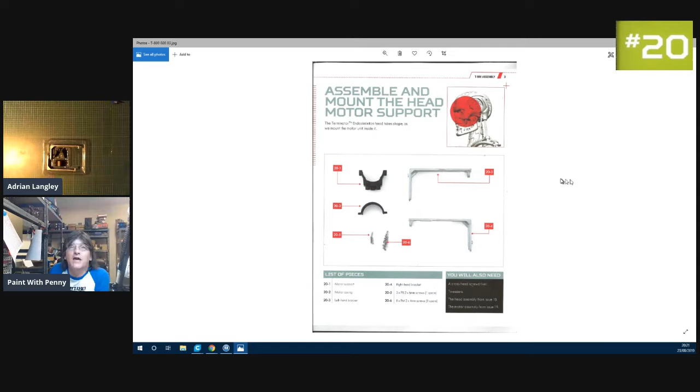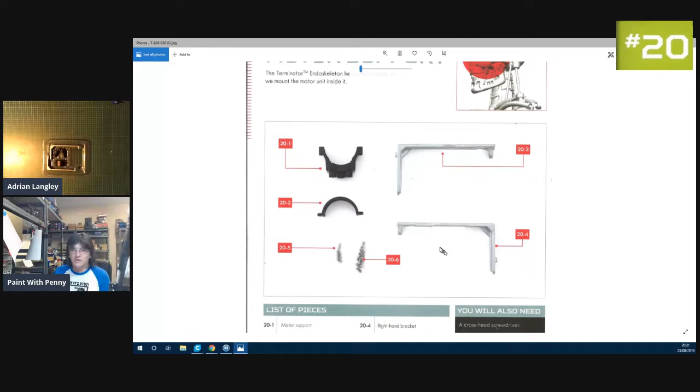As you probably remember, my lower screen is below the shelf. So the parts we've got this week is piece number 1, the motor support.

This looks familiar. Oh, of course it does, I did show them last week, roughly. Do you know what I'm looking at? I'm like, did we do this last week? No, we didn't do it, we just went rough, we just showed the parts off.

Yeah, it's clipped. So you've got piece 20-1 and 20-2, which is the motor support and motor casing, which we speculated will go together to form a circle.

And then we've got piece number 3 and piece number 4, which is the left-hand bracket and the right-hand bracket. Now, they don't look different - yes, they look absolutely identical except for a little nobule. There's one there, and instead of being there, and if you look on the back, does it say L&R on it? Yes, they do. See, that's a good little touch there, isn't it?

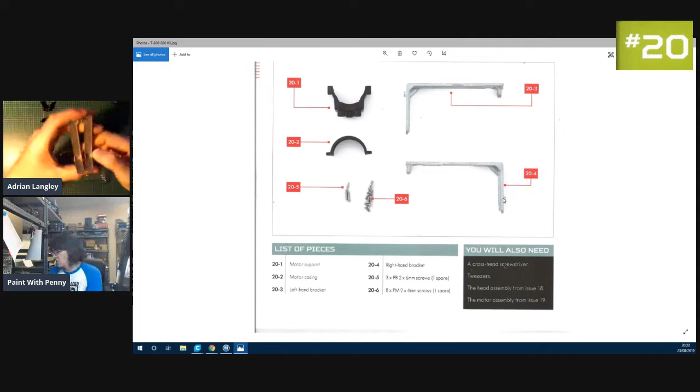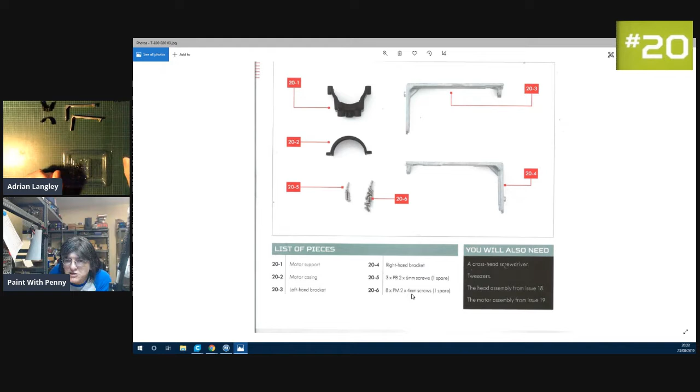So with that, you should get 3 PB 2x6mm screws, so that should be 2 and then 1 spare. And 8 PM 2x4mm screws, so we should need 7 and 1 spare. Okay, and we will also need a crosshead screwdriver, tweezers, the head assembly from issue 18, and the motor assembly from issue 19.

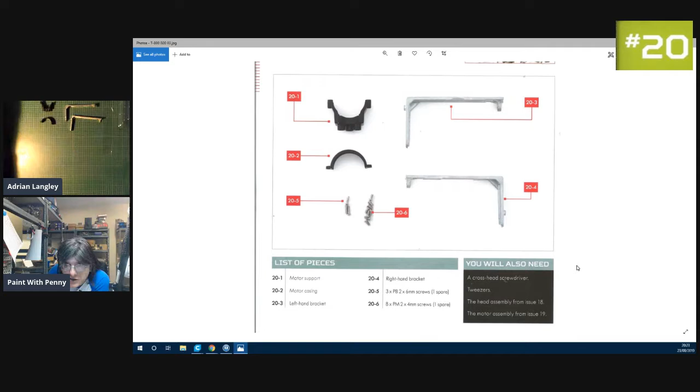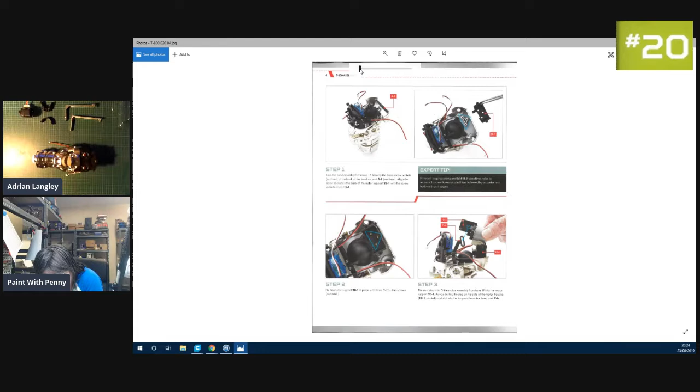So that's nice, I do like when they say get parts from previous issues, because it means we're putting things together. So we have a big jumbling mess. There we go, it looks a bit clearer now. Look, it looks like someone's taking a shot with a bazooka.

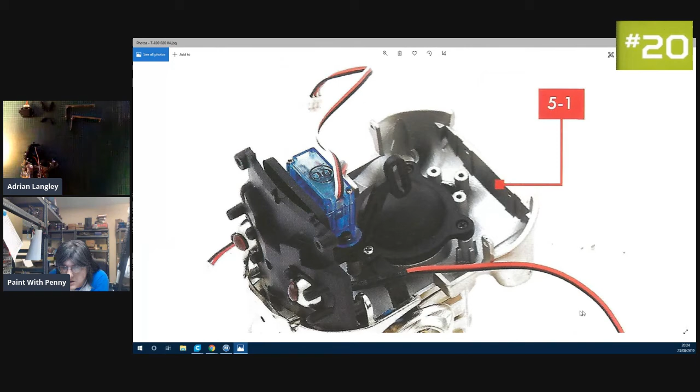So step 1, take the head assembly from issue 18, identify the 3 screw sockets outlined. I can't see the outline on that - can you see where it is? Oh, there - is that them there? Yeah. If you look at the image, you've got it highlighted a bit more. Is it just I've got it a little bit small? Probably. It doesn't look like there's any highlighting, but I can see 3 sockets. So that's fine, as long as there's 3 sockets.

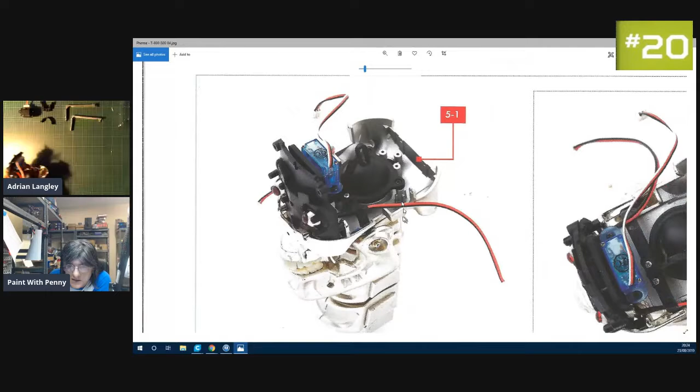Okay, and let's make that smaller again. I wish I could do this with buttons, you know. If anyone knows any keys that I can press to make it bigger and smaller, that would be appreciated.

So we've identified the 3 screw sockets outlined at the back of the head. Oh, do you know what - I'm sorry, I feel daft now. There they are, they're highlighted in the second picture, not the first one.

Align the screw sockets in the base of the motor support, which is piece 20-1, with the screw sockets on piece 5-1. Okay, there's the 3 holes. Lovely, here's piece 1, and you'll find it'll go on like so.

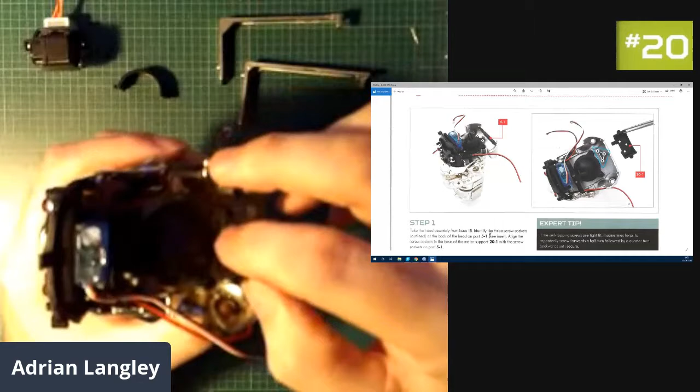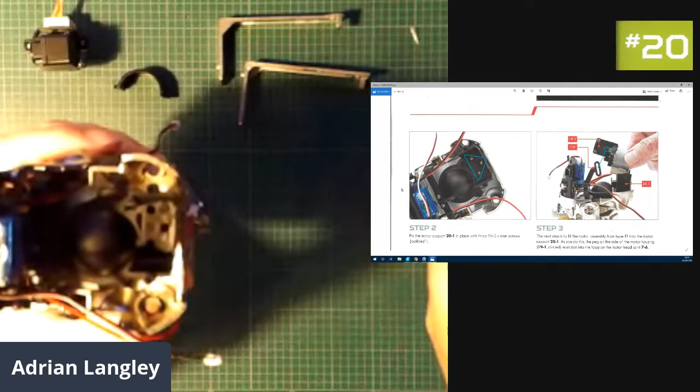So once that's on, we want to fix the motor support in place with 3 PM 2x4mm screws, again outlined, in step 2. There looks like there's going to be an awful lot going into a small space. Yes, because the thing is with these parts is that they're using standard parts - regardless of, you know, if it was a full-size head, there would obviously be the same parts going in, but there would be a lot more room to put them in.

So I just got out the wrong head, I was thinking, why didn't this one fit? So I'm guessing actually it's cheaper for them to do a 1:2 scale Terminator than it would be to do a smaller scale, because they're using off-the-shelf parts. So if they did a 1:3 or 1:4 scale, they would then have to have servos and motors specially made, and that would increase the cost. So bigger is actually cheaper - all the parts might be already on the shelf. Problem is they could be more cost effective. Yeah, but if you compared servo motors as on the radio control cars, could be one size, could be a certain price, and you went for a smaller one - tends to be just a servo, doesn't it?

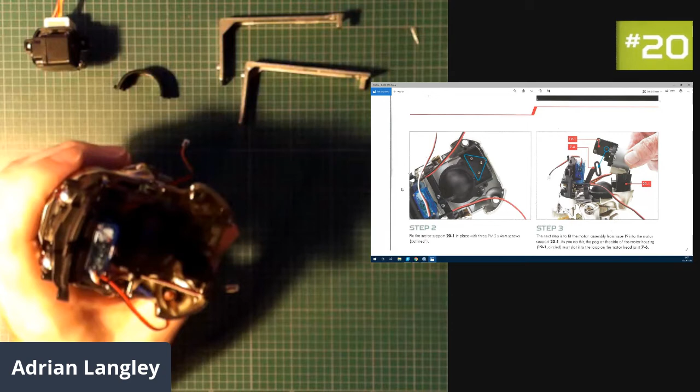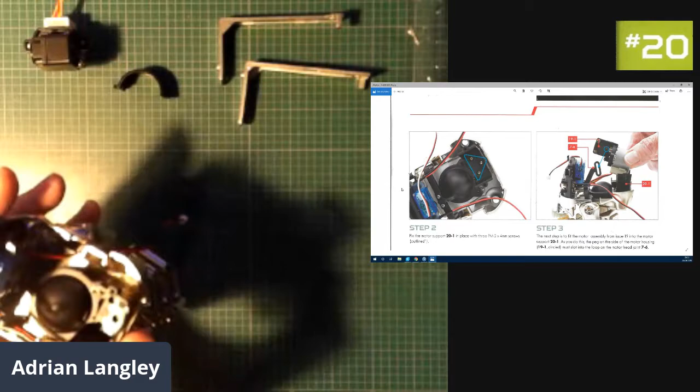Well, it depends if they had to go smaller servos, basically. I don't know if they make smaller servos - I know they make bigger ones, but they tend to use the ones that you've got. I've been doing some updating for another project, so I'm being quoted names, and I'm guessing that's either an MG or an SG - MG90 or SG90 servo. I haven't quite figured out what they mean, but I'm under the impression there's a difference between the SG and the MG.

Right, that's step 2 done.

Okay, so the next step is to fit the motor assembly - this is step 3. Fit the motor assembly from issue 19 into the motor support 20-1, which is the one you've just fitted. As you do this, the peg on the side of the motor housing must slot into the loop on the motor head joint. So there's the joint you've just assembled, and that's the part you're putting there, 19-1. There's a little oval hole bit - what would you call that? It's sort of a guide, isn't it? Yes, so that's got to go into there.

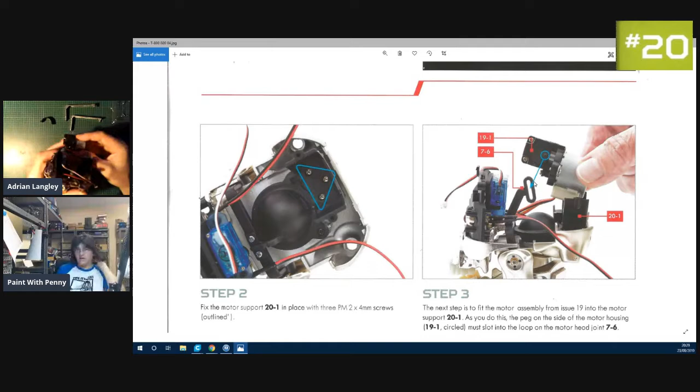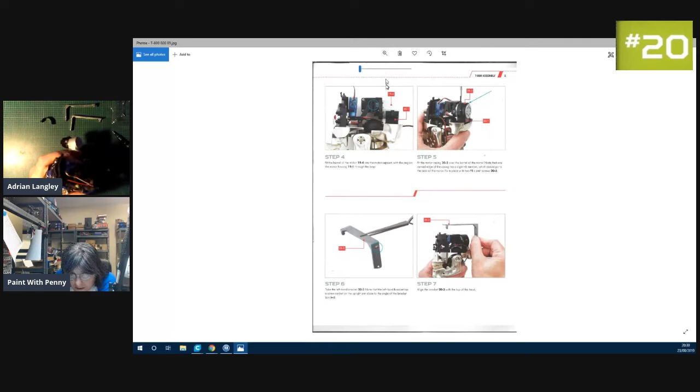So it's a little bit of precision work, lots of dry testing, dry fitting, and I'm guessing what the next stage would be. I'll get that ready for the next bit if you want. But yeah, so that pops in there like so. I'll keep that on screen now.

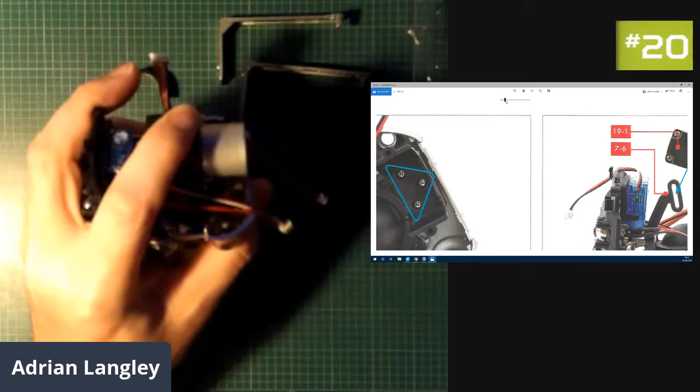Are you guys all right with the instructions being the way it is now? I quite like it, because obviously a lot of people might be following along with the magazine themselves, but I think it's small and big enough that you can still see it, while being small enough that we can focus on what Adrian's doing. Yes.

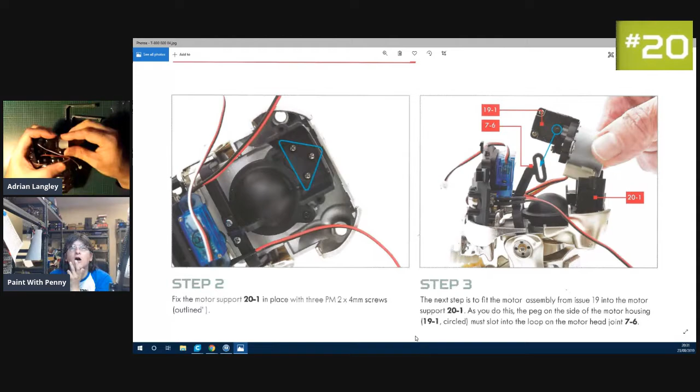So is that as fiddly as I dare say? Do you want to just change the view, Adrian, so we've got you a bit bigger? Well, I disassembled it and put it in, and I took it back to you, by the way. Okay then, I would say just keep the view so the instructions are smaller, unless people actually say no, we want them bigger.

Now, remind me - did we get a test thing with this, a little battery pack? No, only for the lights. Ah, okay then. It would be nice if they had a circuit board, basically something to test along the line - test the motor sort of thing. I'm sure that'll come now.

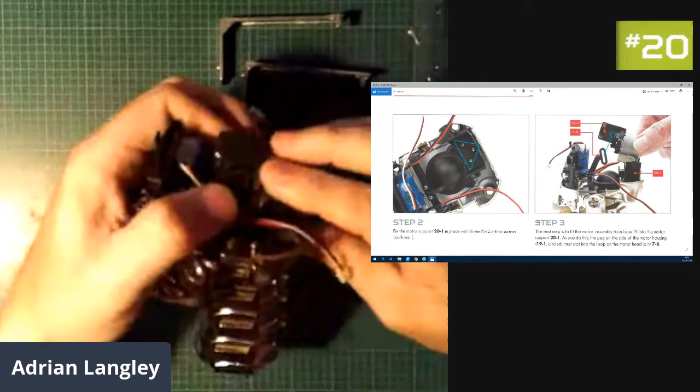Right, so how are you getting on? Is that in? That's in. Okay, doesn't seem to be any screws involved in that. Not at the moment - is that like slotting in? Yep. Okay, if you're happy with that, then stay.

Well, there seems to be a bit of a lag between you and me. Hello, Dave Milne, how are you? Oh, and Dave say so - we didn't say hello, right.

So step 4 is to fit the barrel of the motor, 19.4 - that's the big silver part - into the motor support, with the peg on the motor housing 19.1 through the loop. Then step 5 will be to fit the motor casing, part 2 from this issue, over the barrel of the motor. Note that one curved edge of the casing has a slight rib, which looks like it's going to be near the top, which should go to the back of the motor, fixed in place with two PB 2 by 6mm screws. So basically what we're doing is clamping that motor in place.

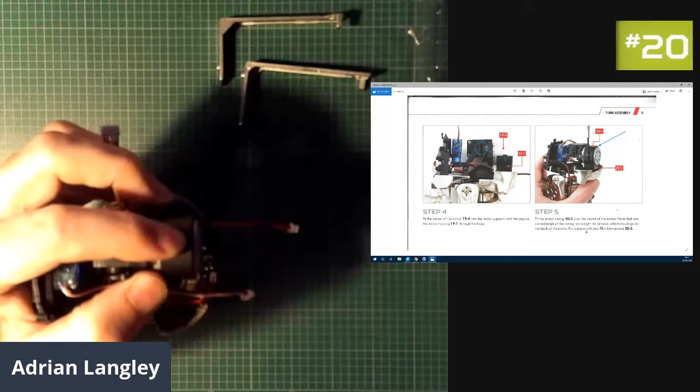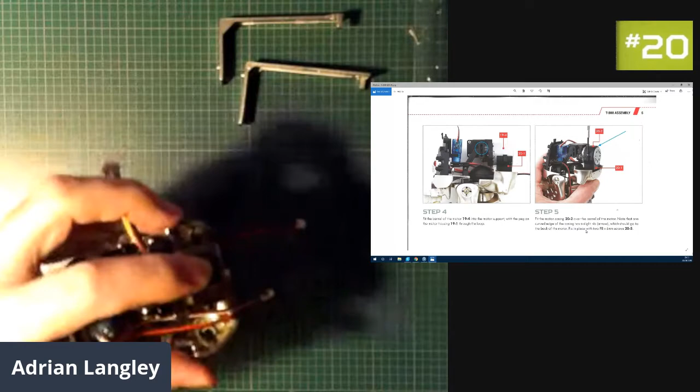Yes, excuse me. Dave Milne had a ride on a PD2 bus today at Beamish. So I am very jealous, to the point I may not talk to him anymore unless he shows us all pictures. That's it - if there aren't pictures, it didn't happen. Have you got any proof to say? Yeah, need proof, we don't believe you. Oh, don't tell me - just sent you some.

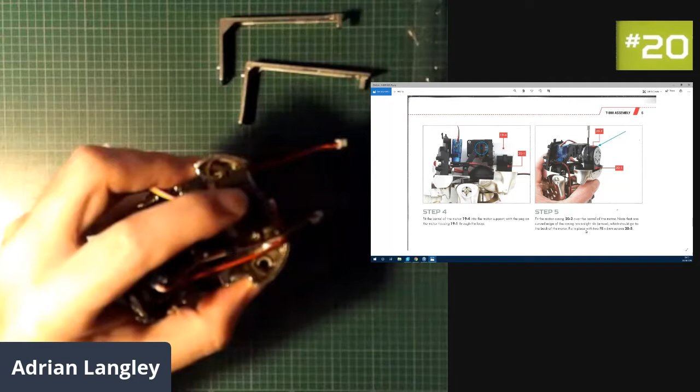No, I'm just getting a bit fed up with Android. I've just checked my phone, and the last couple of weeks I've been getting adverts pop up on the phone. It's not a major problem, I just hit the home button and it disappears. But what's now happened is there seems to be calendar entries put into my calendar without my permission, saying 'have you won an iPhone, 1856 at Best Buy?' And that I kind of object to, because I don't want that. There's a reason I use my calendar, and it tends to be for work. Oh, yes.

Can you reply and say a 2-worded sentence? No, but what I've managed to do is go to delete it, and it's a series of events, so I've deleted them all in one go.

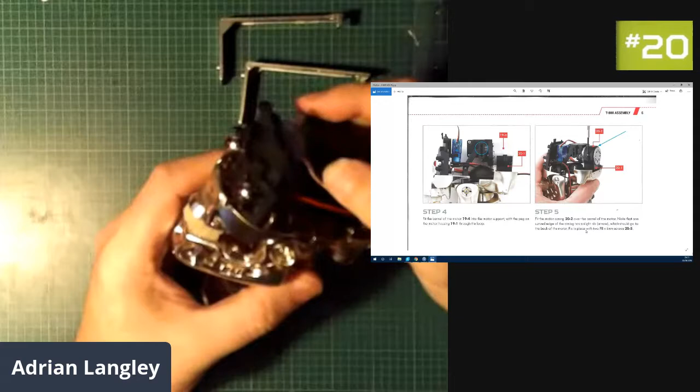It's fine, I don't mind junk. You usually have the option to turn it off, and if I buy things at a great deal that's super cheap, I welcome the occasional junk mail because they might offer me something else at cut price. But I don't go for the 'have you won an iPhone' type things, because you usually find you've got to press about 58 buttons and give your email address to 4 million people, just to find out you didn't win.

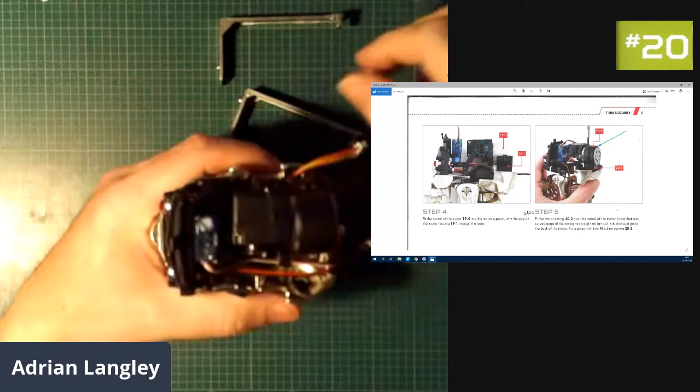Right, I've done that. Okay, that's looking hefty now, Adrian. Right, so we want to take, oh, that looks interesting. So we take the left-hand bracket, piece 3 from this issue. Note that the left-hand bracket has a screw socket on the upright arm, close to the angle of the bracket.

At this point it looks like it's not actually going to fit in there. I'm sure it will.

Right, yes. Is that a little bit tricky, Adrian? No, I thought it might be tricky, but okay, we are only aligning it in there at the moment. There's a pin you've got to locate up there as well.

Right, okay, so we can guess what step 8 is going to be, with your 14th arm that you've just grown to help you with this build, hasn't it? Okay, the tab with the screw socket at the front of the bracket will fit in front of the screw socket on the top of the head. This is a locating hole in part number 3, which matches a locating peg on part 1, 2, shown above.

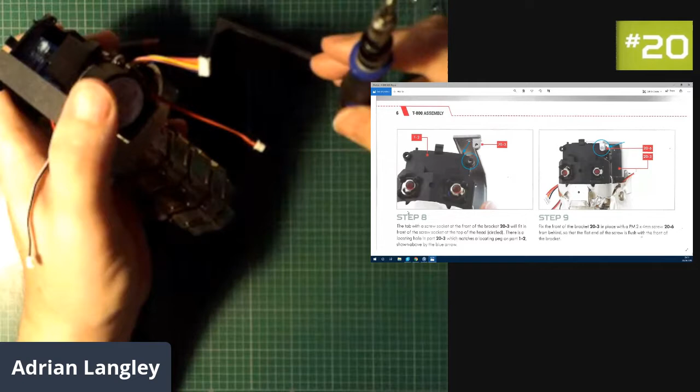Well, yeah, I mean, I would have attempted that from the way you've just done it, because it says fix the front of the bracket in place with a PM 2x4mm screw from behind. So from behind is your screwdriver at the back of the head and the screw at the front of the head. Yes, okay.

So are you ready for the next step? Yep, well, I'm about to do it. Okay, can you do me a favor, can you just show us the front of that screw, but from the front of the head?

Yep, certainly, just want to see how does that stick out, does it show? No, it doesn't stick out. It looks like it's about half a mm shorter, another half mm and it'd be flush with the bracket.

It's in enough to catch that bracket. Yes, it's in enough, but not long enough. If I run my nail over it, I do feel it, but it's not long enough to be sticking out beyond the front.

Correct. Yeah, so do us a favor, give it a quick wiggle. How secure is that? Because it doesn't seem to have been secured at the back, does it? Has not yet. Right, but look, there's a screw hole there, is there? Yes.

Probably a circuit board or something, do you think? Well, I reckon the circuit board on the back. Other people reckon there might be a battery pack going in there.

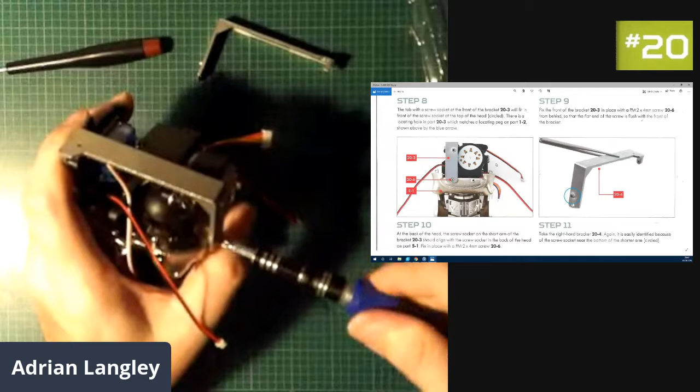Let me just catch up with what you're doing. So at the back of the head, the screw socket on the short arm of the bracket should align with the screw socket in the back of the head on part 5-1, fixed in place with a PM 2x4mm screw.

Now we're using 7 of these screws, aren't we? Yes, we've already used 3. These ones. Of course we have, yes. Yeah.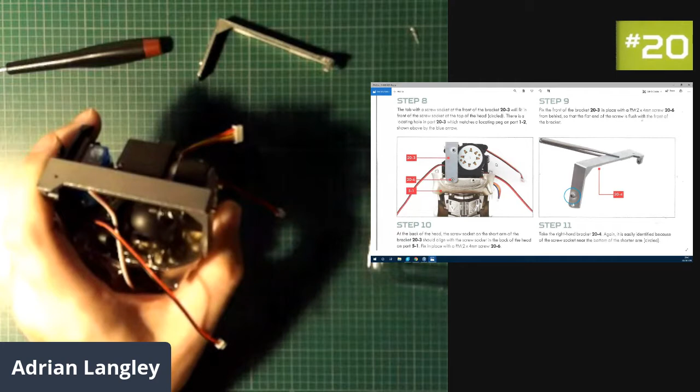Did that not go in well? Oh no, it's all right. So okay, you know it did go in, all right? Okay.

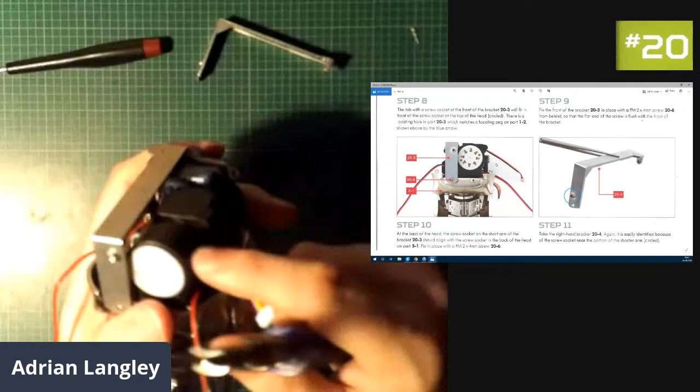No, I thought those 2 ones there were meant to be the long ones. Of course, no, the long screws weren't there. I just forgot about it. I just basically lost myself in what I was doing.

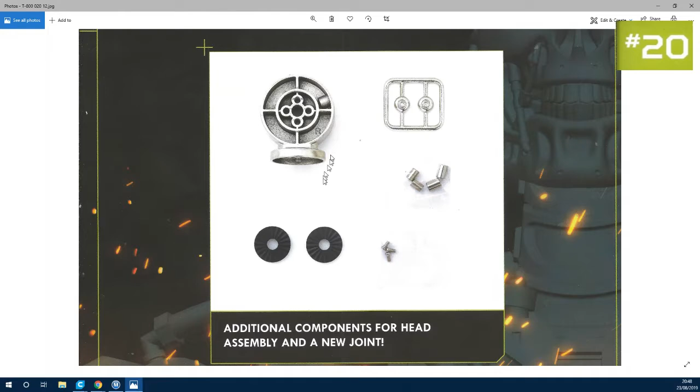It's the top of the shoulder. Okay, joint. So near the arm then. Close to the arm. Reminds me of a joke. Where did Napoleon keep his armies? I don't know. Up his sleeves.

Right, so this is the cover of issue 21. Always the same every week, aren't they? Just with a different number. So we have got: assemble the right shoulder joint and connect up the skull.

Now I'm excited. So the pieces we have got in this issue, we'll begin building the right shoulder, tidying up the jaw joint and connecting the head to the top of the skull. So we are close to finishing the head then. Yep.

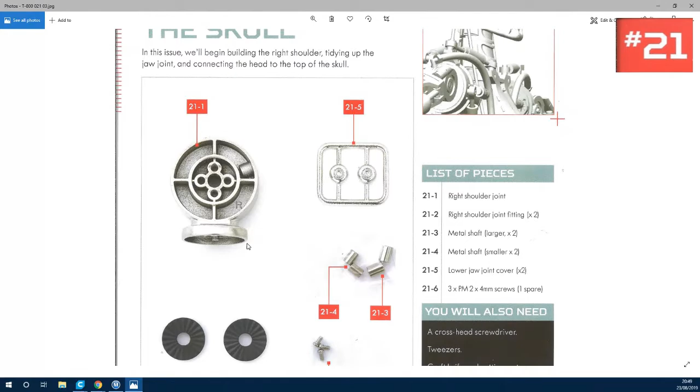Lovely. So the first part we'll need is a right shoulder joint, and that's the piece that is metal. Oh yeah, let me just - that's fine, Dave, I'll bring the picture up later on unless you object. It's very nice stuff anyway.

So we've got, I'm guessing they're identical, just a different size. You've got metal shaft, the ones on the right are larger than the ones on the left, which is piece 4, metal shaft smaller. And I'm going to guess they're metal because they're called metal shafts. Yes, bit of a giveaway, wasn't it? And then piece number 5, which I'm going to guess are plastic because they're on a sprue.

Lower jaw joint covers. So we're going to screw a bit of the head in, and then we're going to cover the screw up with those, are we? Well, they're to cover the mouth joint.

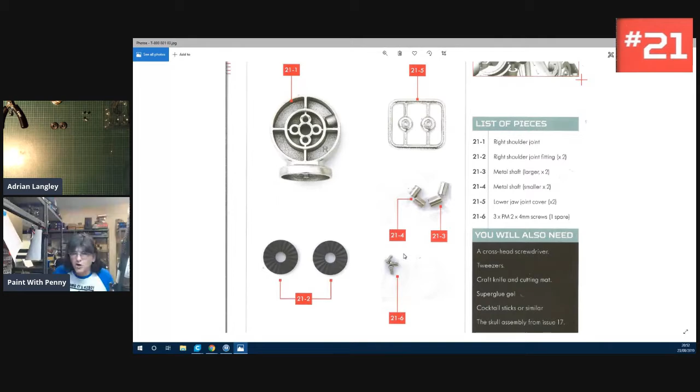So I would actually be looking at sprue cutters myself. Here we go. And then just trim it up with a knife or a file once you've cut them off. I have a slightly different way of cutting - I don't go right up to the edge of the piece. I go about 1 or 2 mil from it, and then I'll just finish it off with a file. But that's my way of doing it. Copy me if you want or not.

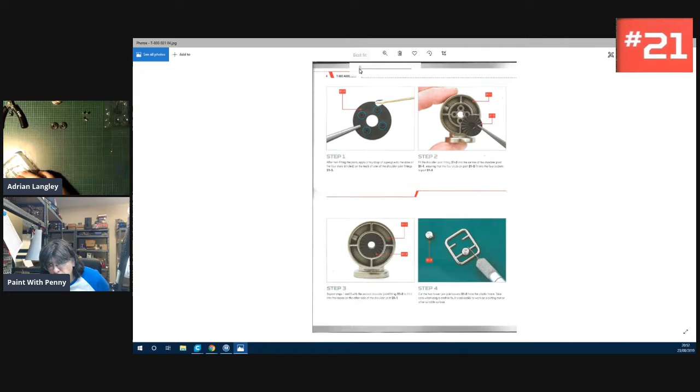Oh yeah, it's person's choice, isn't it, sort of thing. Yeah, I'm just worried sometimes, especially like when I used to do the older, cheaper model aircraft kits, you can go right up to the end and split the actual piece that you want to use. So right, just bear with me one sec. So I've got a glimmer of optimism.

Oh no! It's failed. No, it hasn't failed. Oh, right. No, sorry, right.

The printer has been playing up. I've been running it now for a couple of hours, and it hasn't had a blockage. What happens is the extruder clicks, and it hasn't clicked for ages. I just went to have a look at it, and as I got to the printer, it just went click. I'm like, bugger. So anyway, back to this.

Couldn't you try and push it? Oh no, it's the filament in the tube. You couldn't try and push it in through, could you? No, I've got other ideas I want to try, but they all take time.

What I'll do is wait for this print to completely fail, because sometimes it recovers itself. Not to worry. Right, Phil.

So step 1, after test fitting the parts, apply a tiny drop of super glue to the sides of the 4 studs on the back of one of the shoulder joint fittings, piece 2 of this issue.

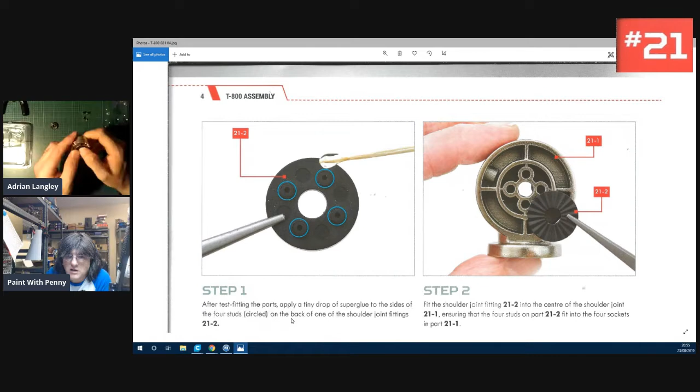So step 2 will be to fit the shoulder joint, piece 2, into the center of the shoulder joint, ensuring that the 4 studs on part 21.2 fit into the 4 sockets in part 21.1.

Well, Chris Campen, he basically had to do it off stream because he put one in and then had fun trying to get it out, so he had to do it later.

What issue are we actually up to in real life? Because obviously we've been doing 2 to catch up, so I'm wondering how far we are from doing just a single issue every week. Right, the last issue I bought from the shop is issue 26. And all the subscribers, we're nearly there then, aren't we? All the subscribers have received issue 26.

I'm afraid I have not received both my issues. No, that's fine, we'll get there. We were doing 2 issues a week to catch up because we started part way into the build, and then we had a few problems, mainly caused by me. So we said we'll do a double issue to catch up, and I'm a little bit sad that we're catching up now, because once we get to 1 issue... although maybe it's all worked out.

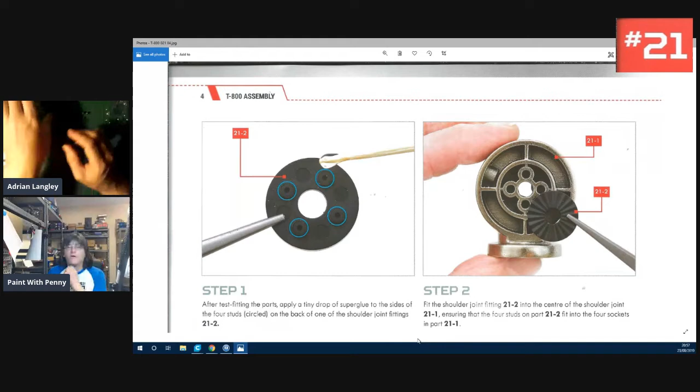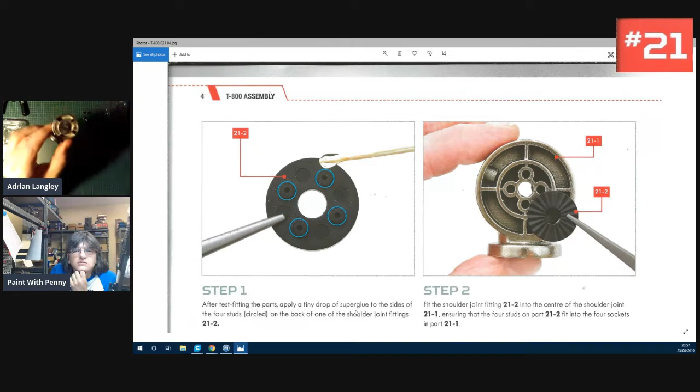Right, that is done, that is done. Can we have a look? Or would you rather leave it for the glue to set? Well, it's not a joint you can actually move about, so it's there you can basically show it. Right, okay, that's fine then.

So step 3, repeat steps 1 and 2 with a second shoulder joint. So remind me, did we get another joint in a previous issue? No, this is the same joint.

Well, we'll do. So are we going to be doing the other side then? Right, okay. So repeat steps 1 and 2 with the second shoulder joint to fit it into the recess on the other side of the shoulder joint.

Gotcha, right, okay. So step 4, and that's nicely done actually, because we can now work on something - here's another one not done. Right, okay, so that one needs it. Is that the one we're going to be putting in? So are we going to be waiting for the washery bits to go into that second one? Yes, right, okay, that makes sense now.

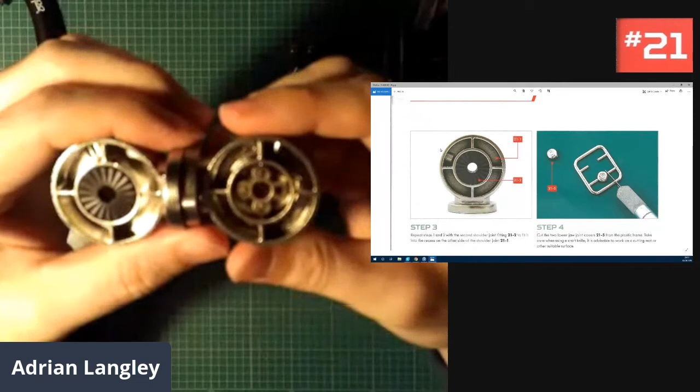Well, that's jumping ahead. That's the right, that's the left. Yeah, gotcha, right. It's like a pair of eyes, Adrian.

Sorry, just bear with me one sec, Adrian. I can't work out if my printer is pulling filament through. I had a bit of masking tape somewhere - because the rolls of filament are black, what I often do is put a thin strip of masking tape on it, and every couple of minutes I'll have a little look. If the masking tape's in a different direction or position, I know it's moving. So obviously the masking tape is white... that's gone again.

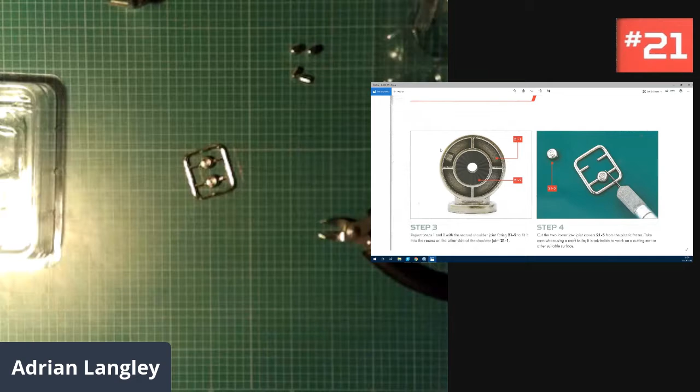Right, sorry Adrian, I'm with you now. I do apologise. That's okay. So yeah, from a distance I can see a bit of white tape on a black background.

So step 4 is to cut the two lower jaw joint covers from the plastic frame. Take care when using a craft knife - it is advisable to work on a cutting mat or other suitable surface. Don't do what I do and cut towards you, you tend to end up with cuts in your thumbs. If you're using sprue cutters, always hold the part because they do tend to fly.

Of course, it will gradually go into there.

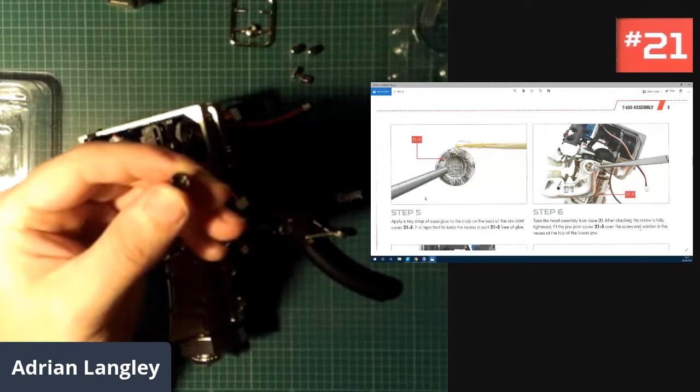So stage 5, a tiny drop of super glue to the studs at the back of the jaw joint. It's important to keep the recesses free of glue. Then step 6 will be to take the head assembly from issue 20. After checking the screw is fully tightened, fit the jaw joint cover over the screw and washer in the recess at the top of the lower jaw.

I tightened the screws earlier, if you're just wondering. Okay, I had them. So I didn't cut them both off, I just wanted to try one first off. That's fine, I would cut them off as I need them.

So I'm guessing the next step is to repeat. Yeah, step 7 repeats 5 and 6 to fit the second jaw cover on the other side of the head. Grip the two covers in place while the glue dries.

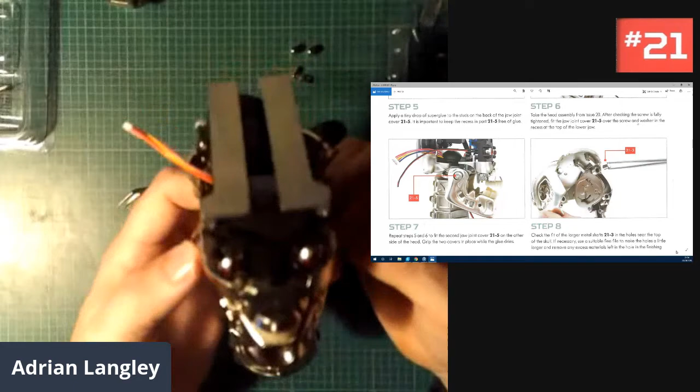Because I wanted to first try which way around would be best, since you had 4 holes in there. I couldn't remember on the black bit where the 2 pins were, so I wanted to try it out roughly, see which way would be better first off - that's why I test fitted it first.

So once that glue is dried, you've got no access to those screws anymore. Correct. Which is obviously why you made sure that they're tight.

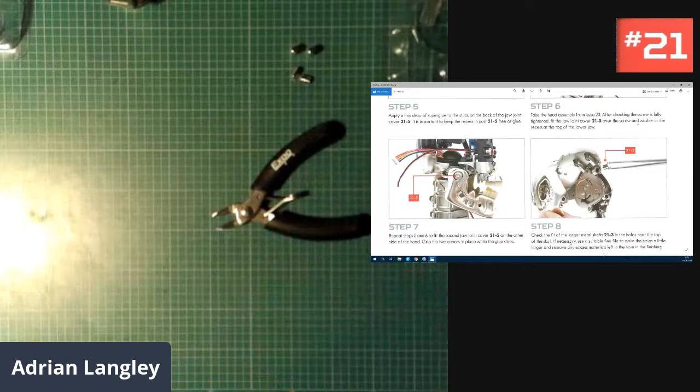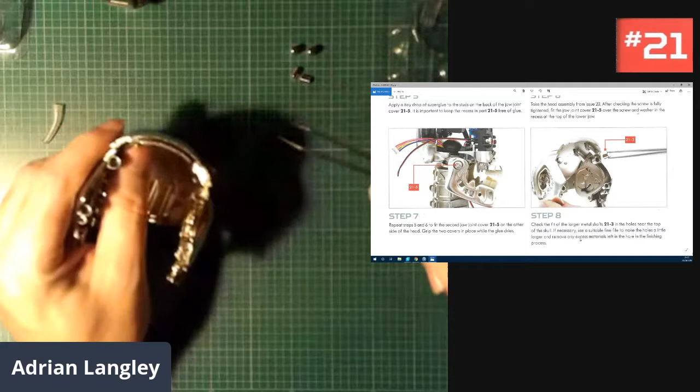Yes, okay, so step 8, check the fit of the larger metal shafts in the holes near the top of the skull. If necessary, use a suitable fine file to make the holes a little larger and remove any excess material left in the hole from the finishing process. So is there much difference between the larger and the smaller ones?

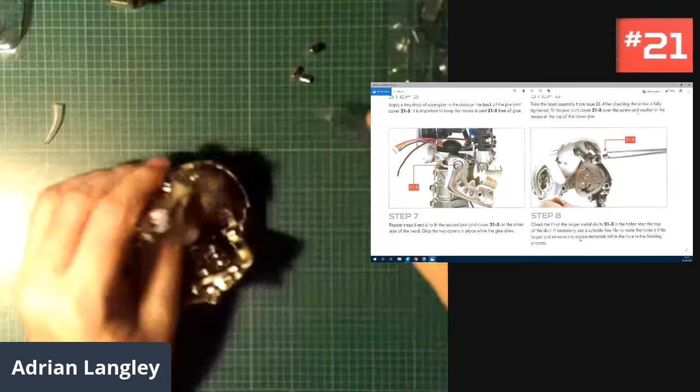Yes, and I can now see why they're metal. Right, okay, so that's blown my theory about the battery pack, isn't it? Because I said if you've got a battery pack on the top of his head, you're not going to access it because it's going to be inside the head. But if you're putting metal parts in, I'm going to guess there's going to be a magnet involved somewhere. Correct, which will hold the head in place. So you're going to obviously need access to inside the head because they're making it so easy to take out - take off even. Correct.

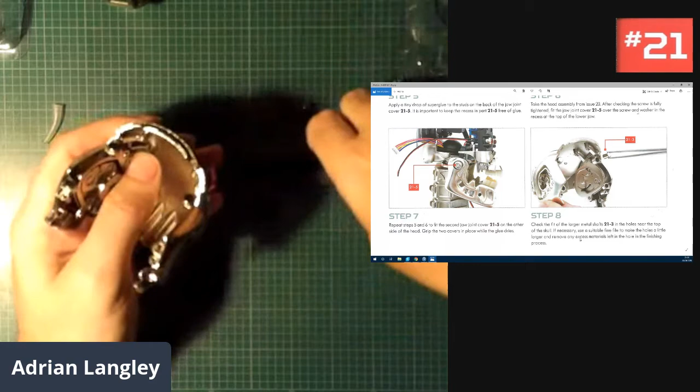So I'm guessing step 9. Right, so what we're going to do next, after we've dry fitted those, step 9 will be to remove the shafts and apply a little adhesive to the sides of one hole, fit the first metal shaft into the hole, and then step 10 will be to repeat with the second one. And then we repeat that whole process with the smaller shafts.

Of course, they're not magnetic because they wouldn't be sticking to each other - if they were magnetic, they'd be sticking. No, those parts will be metal, but there'll be magnets involved somewhere else. It's funny because every time I've magnetized stuff, I've always used 2 magnets, but the problem with using 2 magnets is there's a whole process involved in making sure they're facing the right way, because magnets have a north and a south and won't stick together the wrong way round, whereas both north and south will stick to metal. It means the connection won't be so strong, but it's a lot easier.

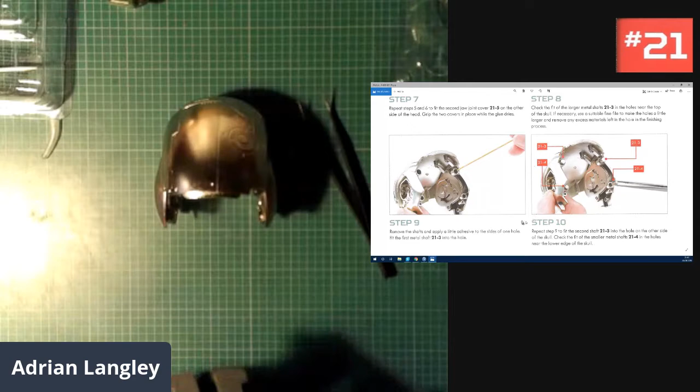So I think that might be it. No, that's not it. Lovely, we've got more to do.

So step 10 is apply a little bit of glue and glue the two together. So have you done the 2 smaller shafts?

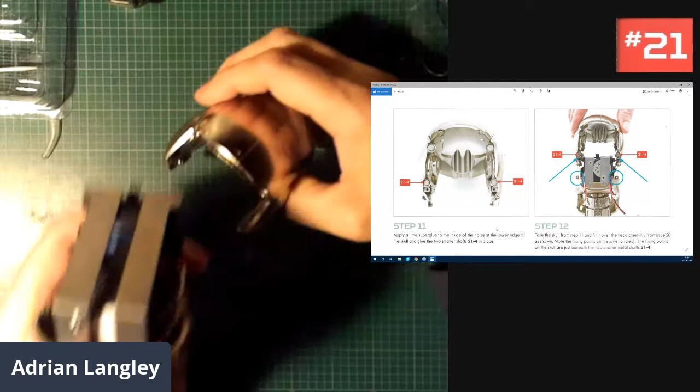Yes. Right, step 12: take the skull from step 11 and fit it over the head assembly from issue 20 as shown. Note the fixing points on the jaws circled. The fixing points on the skull are just beneath the two smaller metal shafts. So that should in theory fit a little bit better than it did earlier in the stream. Oh, about the same. Okay.

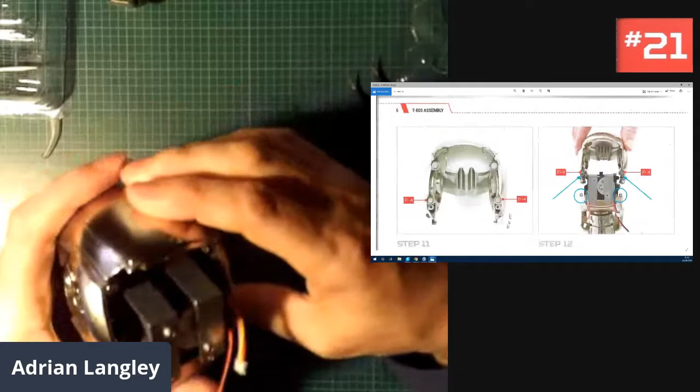So no magnets involved then? No.

Just one side doesn't want to really go down.

Hang on, I got an idea. Sorry, what's happened, Adrian? I can't.

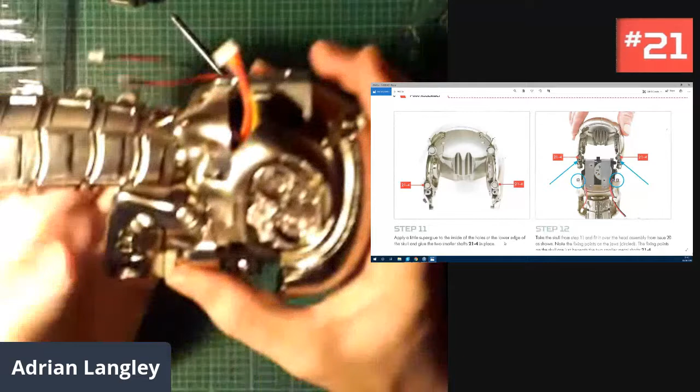Right, as you can see this side has gone down nicely. It fits in there nicely. This side here does not want to go down nicely.

So what I'm going to do is... is the skull a little bit out of shape, or is it not put in properly, or is one part actually going... Is that part I can loosen?

See, if you've got a slightly damaged part, you probably wouldn't know till this stage, would you? Guess you wouldn't know. So has anybody else had this problem?

Well, it's a good job you know your stuff, Adrian, because I probably wouldn't have thought to do that. Well, go through and unscrew, loosen screws on a completely different bit. I mean, obviously it might be different if I've actually got it in my hand, but try and loosen something, then see if it'll go in. Yeah, I mean, it could be those L-shaped plates we put in.

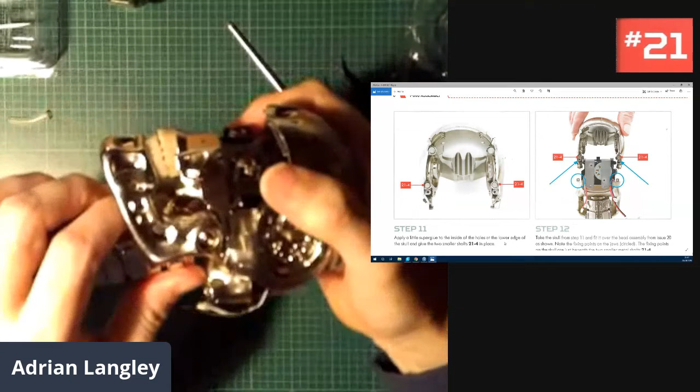So you probably won't be able to pull that head bit off. I mean, you're not -- well, I don't know. Don't try to, Adrian, in case you can. There we go, it might not go in again now. That's kind of why I said don't pull it off. Yeah.

Okay, so for those of you who wanted to see Adrian do that again, here we go.

Well, it's a lot better position now for me to actually put in and out if I need to. Right. Is it the camera angle? Does that head look a bit lopsided? I think it was camera angle. Camera angle is fine. Okay, that's fair enough.

You might find the neck was a bit of tilting. Yeah. So when you're happy that glue is dried and everything works, we need to take the skull from step 11 to the fixing points. Right, okay.

So the next stage then is to fit 2 screws, PM 2x4mm. Now, I've just paused you there, Adrian. We've got a big red box and it says make sure the cables are all accessible at the rear of the head. Right, we've got one there.

I have noticed you keep pulling. That's a jaw motor. Yeah, that's one eye. Are they labelled? That's the other eye. And that's the eye motor.

No, they're not labelled. Right, I have noticed that you're being quite neat with your cables, wrapping them around the back to get at different bits, which is obviously good practice. Well, one of them did get caught down there and I had to get it out today. Ooh, ouch. Yeah, so I always make sure. Well, that would officially be a trapped nerve, wouldn't it? Yes, and trapped nerves are very painful.

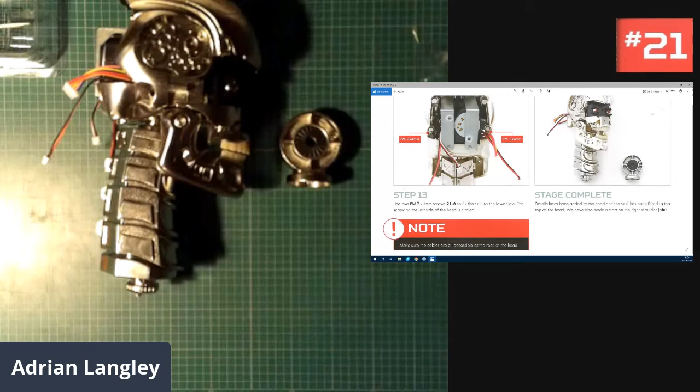Here we go, very funny. Two extra lids, the same. Exactly the same, yeah. But it makes it more cost effective, doesn't it? Yes.

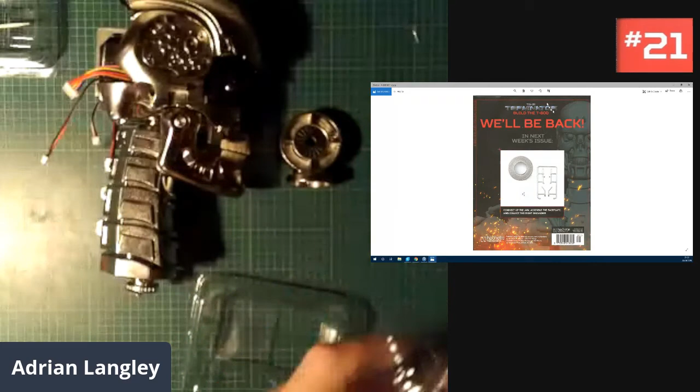Trying to get a good position on these. So more head work next week. So next week we will connect up the jaw, assemble the face plate, and collect the right shoulder.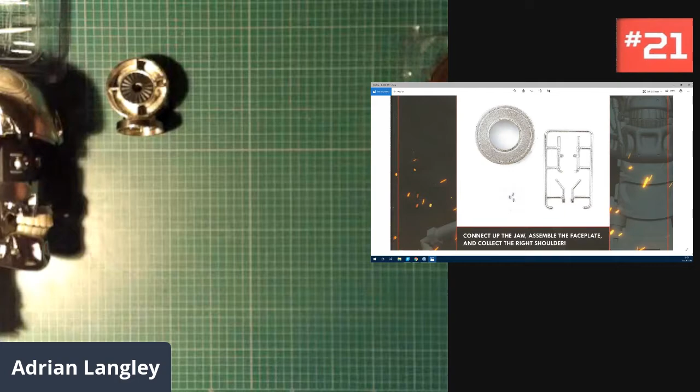What context are they using the word connect? Do you think they meant connect? Collect, collect, not connect. Collecting. Right, so what context do you think they mean collect? So we've got connect up the jaw. Or get, probably getting, to be honest, I would say. You're getting, okay, because I think we don't do anything with it.

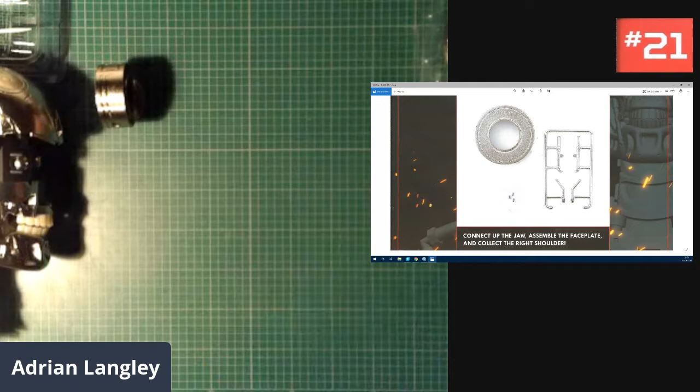So we've got, looks like, well I'm going to call that three parts, although it's actually one, two, three, four, five, six. So we've got three screws, which will obviously be two screws. We've got a circly bit, which is something to do with the jaw, side of the head, face plate. And obviously those screws look like some kind of detailing, and they'll probably be glued on.

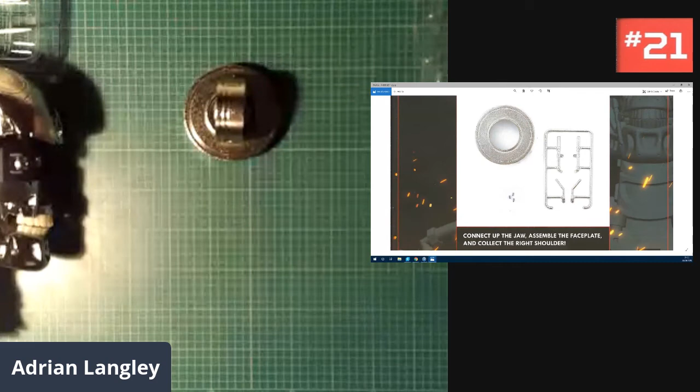Oh, you've already got it, have you? Yes. So what are we thinking, guys? I thought that was another two good issues. I'm just going to close this down now.

Oh, I lost my cursor. Trouble with having two screens is that you have two places your cursor can hide. Right, so I'm just going to try and see if I can pull this picture up. Why don't you change the color of your cursor to black? Because it's on a black background. What I normally do is just fling my cursor all the way up to the left, top left, and then I work it out from there. Right, computers.